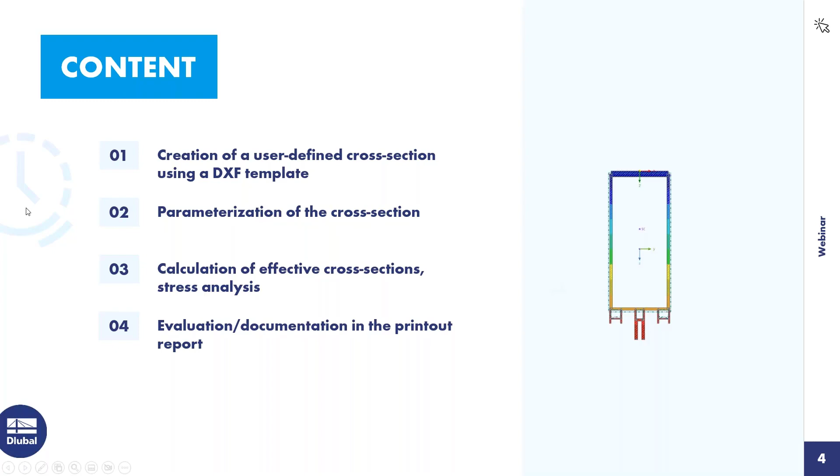The standalone program R-Section determines the section properties for any thin-walled and massive cross-sections and performs stress analysis. If you want to design special sections in RFEM or RStab that are not contained in the section library, you can create them with R-Section.

You can then import these user-defined sections into RFEM or RStab. Sections can be generated via graphical or tabular input, via importing a DXF file, or using a script. Furthermore, a parametric input is possible.

Today, I will first show how to create a cross-section by importing a DXF file, and then I will parameterize the cross-section.

I import the DXF file via Import DXF. Here I have to choose the corresponding DXF file, and then I click on Open.

In this window, I can specify the insertion point here, or I can define a rotation, or it's also possible to do a system transformation. The Z coordinate is supposed to be mirrored, so I check the corresponding checkbox.

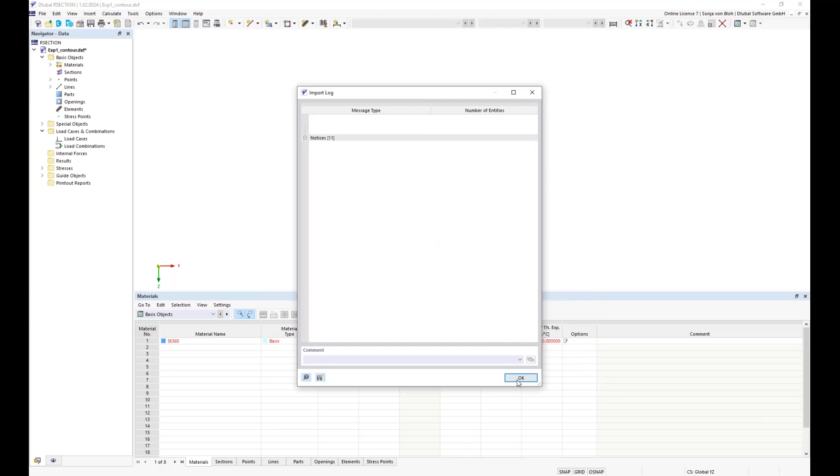And click also OK, and then all lines will be imported.

Then I set the analysis method in the base data dialog. Here I open the base data dialog and I can choose the analysis method. The following analysis methods are available.

It's a finite element analysis and the thin-walled analysis. The difference between the analysis methods finite element calculation and analysis of thin-walled structures is a calculation of the cross-section values and stresses on the gross cross-section. With the finite element calculation, the calculation is based on the FE method. When analyzing thin-walled structures, the calculation is carried out analytically.

The effective cross-section can be calculated for both analysis methods. A license for the effective cross-section extension is required for this. The green dot here in front of the extension indicates that a license is present.

After activating the extension, a standard must be selected according to whose rules the subpanels are to be generated and the effective cross-section is to be calculated. The following standards are currently available: Eurocode 3 Part 1, Eurocode 3 Part 3 for cold formed sections, and Eurocode 9 for aluminum sections. Here I choose Eurocode 9 for aluminum sections.

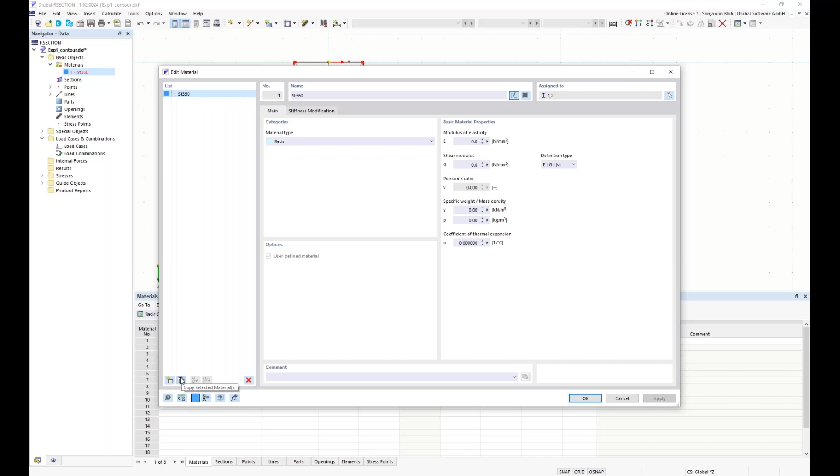I can create or copy another material on the list here on the left. These are the buttons for creation of a new material or copying the selected materials, and I can also delete the selected material. I can enter the name of the material directly here in this box. R-Section then lists all materials that match that name. If I enter the name here, you can see the corresponding materials.

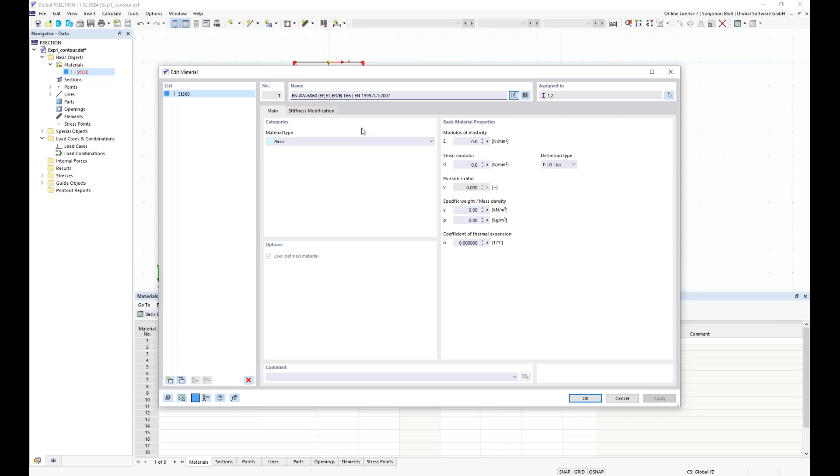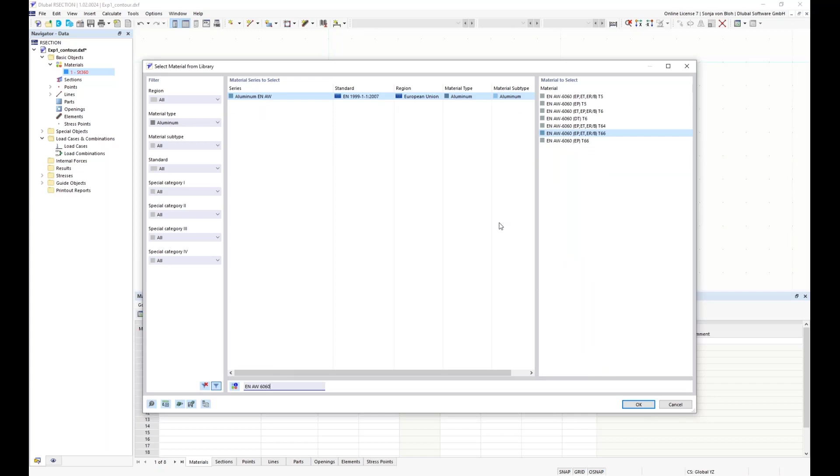I can also open the material library for a specific selection via this button. In the material library, filters are available to quickly find the material. I can choose the material type, subtype, standard, and so on. There's also a search available in this window. I can directly type in the name of the material, choose it, and click OK.

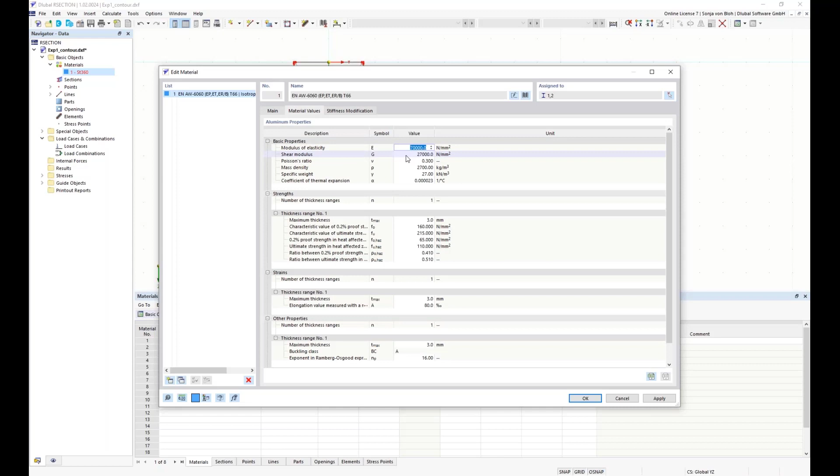If the material is not in the material library, I can create this material by activating the checkbox user-defined material. If I now go to tab material values, I can define the properties that I want. I don't want to do this, so I uncheck this checkbox and click OK.

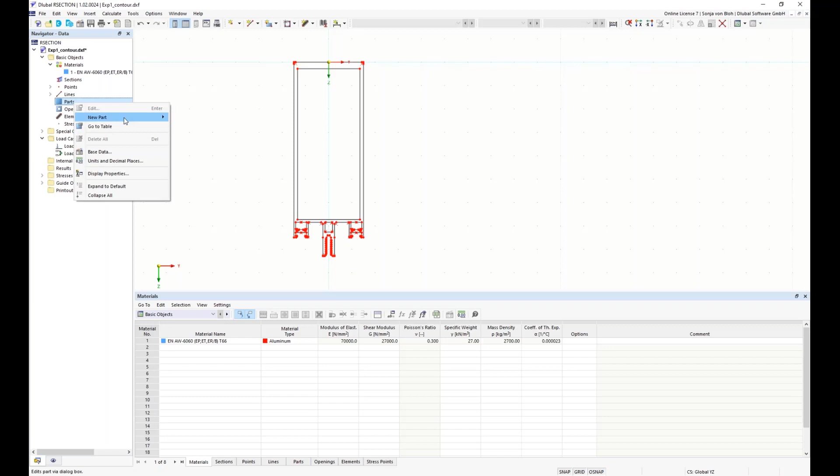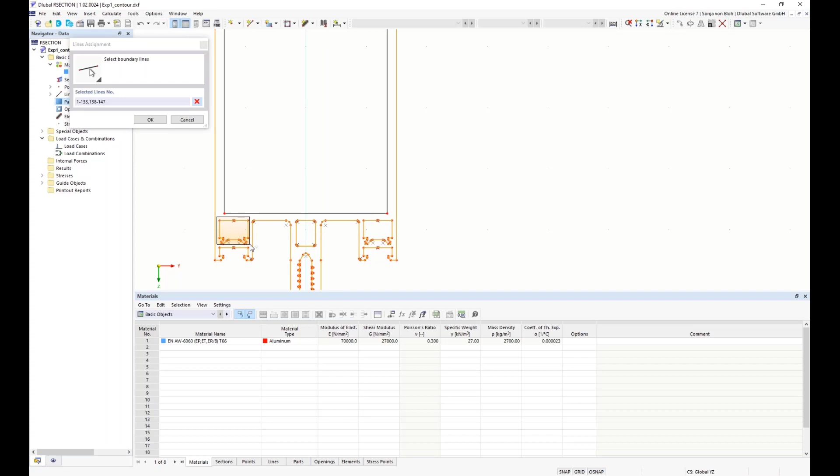After defining the material, a part must be defined for the cross-section. This part must be defined for all analysis methods. I create this part by selecting the boundary lines. For this, I go to the navigator data, then to a new part, boundary lines. Then I pick all lines, and I want to deselect the openings. I hold down the Shift key for this, and select the lines that I want to deselect. Then I click OK. The material has already been defined here. Then I click OK.

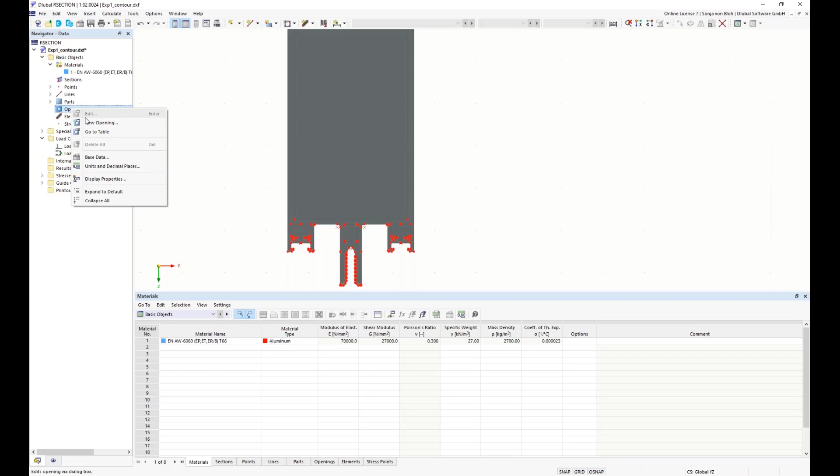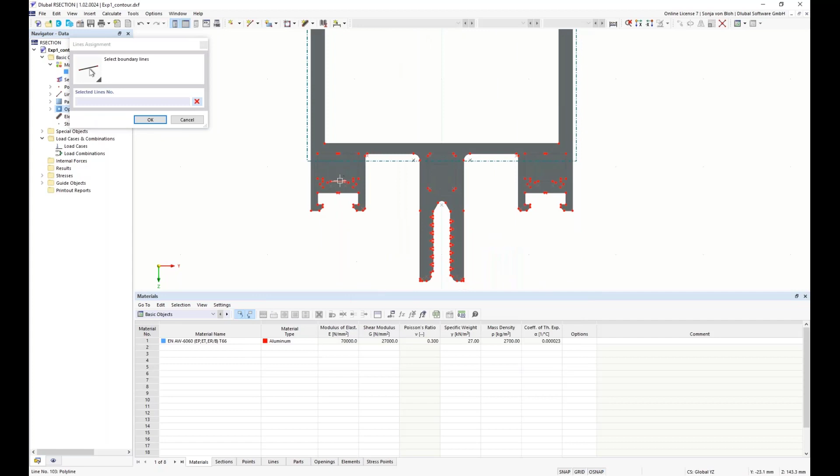After creating the part, I still need to create the openings. I will do this via the navigator data. I right-click on the openings and choose New Opening, then select the boundary lines. I click Apply and Next. Then I select the next boundary lines. Apply and Next. Next boundary lines, Apply and Next. And the last opening. Then I click OK.

For calculation of the gross cross-sectional values using the finite element method, my entries would now be complete. However, I want to make a classification and calculate the effective cross-section, so I also need to define elements. The definition of elements is necessary since the subpanels are only available here. The definition is also necessary for the calculation with the analysis method thin-walled analysis. Based on the elements, some cross-section values such as torsional moment of inertia and warping resistance are calculated if the analysis method for thin-walled structures is selected. If the finite element analysis is set, the gross cross-section values are calculated using the FE method.

The subpanels are automatically generated based on the standard selected in the base data dialog. These cannot be changed. If no elements are defined, a cross-section classification in RSECTION and the design add-ons of RFEM or RStab is not possible, and it's also not possible to calculate the effective cross-section. In the design add-ons of RFEM or RStab, this cross-section is then designed according to cross-section class 3.

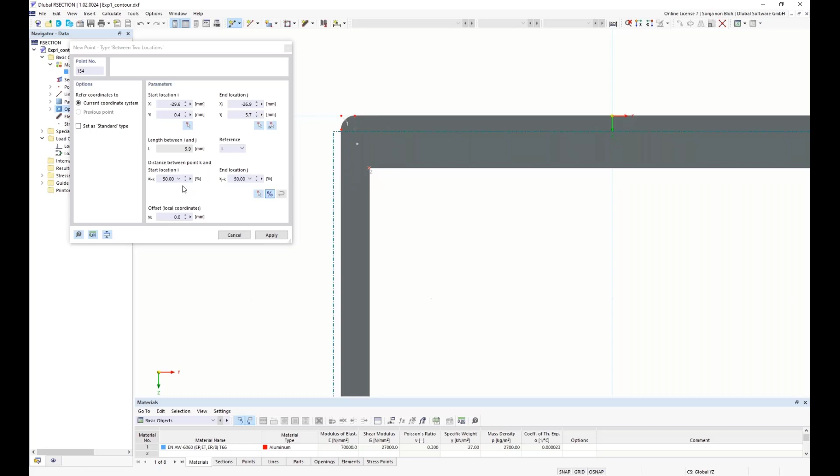I can now graphically create the start and end points of the elements, for example using the function between two locations. For this, I select the first point and then the next point, and then I can define the distance between the two points. I don't want to do this today, because it's also a good idea to create the center lines in the CAD application and import them as a background layer.

In contrast to the DXF import, in which the complete model is imported and converted into points and lines, the background layers represent a kind of layer for modeling. For this, I open in Navigator Data the background layers. Here, a background layer is already imported. I delete this because I don't need it today. Then I go here to new background layer.

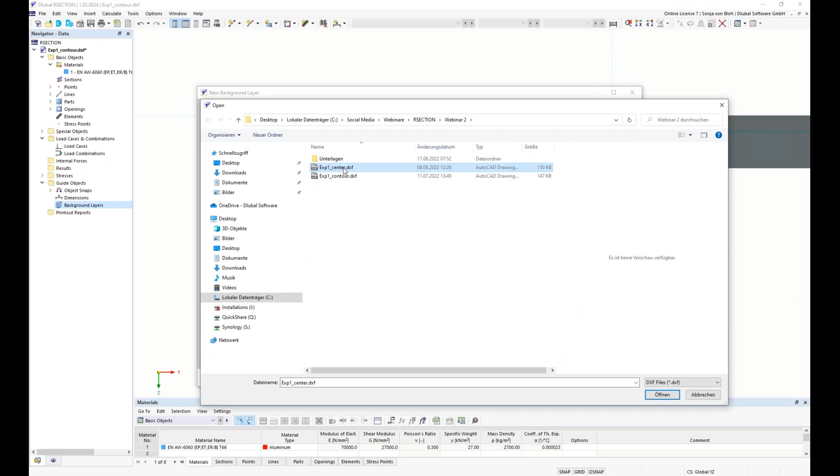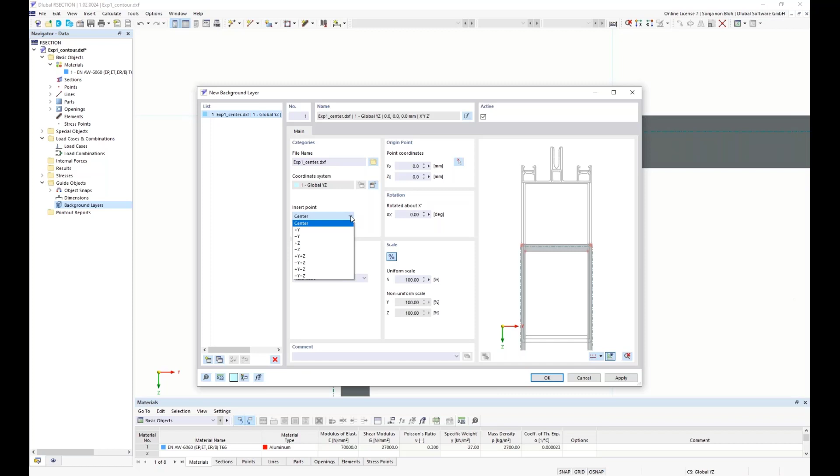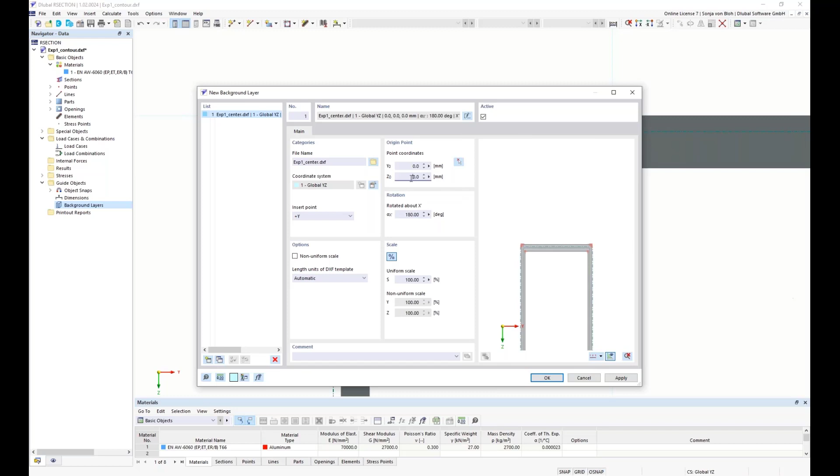Here I first select the DXF file to be imported via this button, Open File, and I choose the DXF file with the center lines. Then I click Open, and the insertion point, this point here, determines where on the envelope the background layer is placed at the origin point. I choose +Y here. I leave the origin at the 0 point, and I define a rotation of 180 degrees. I see the result in the graphic here on the right, and then I click OK.

Now the background layer is imported. Then I go to Object Snaps, and I want to control which options are activated. Here the options points, centers and focuses are activated. Points is already activated here, so that the start and end points of the center lines of the background layers are snapped. This is this checkbox.

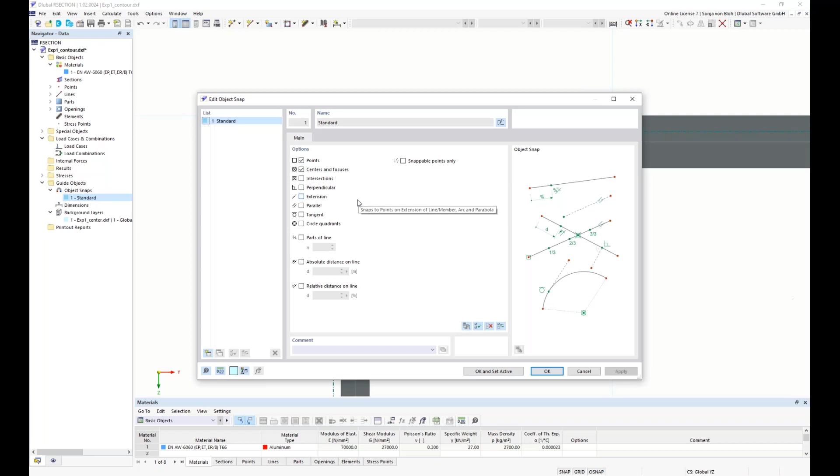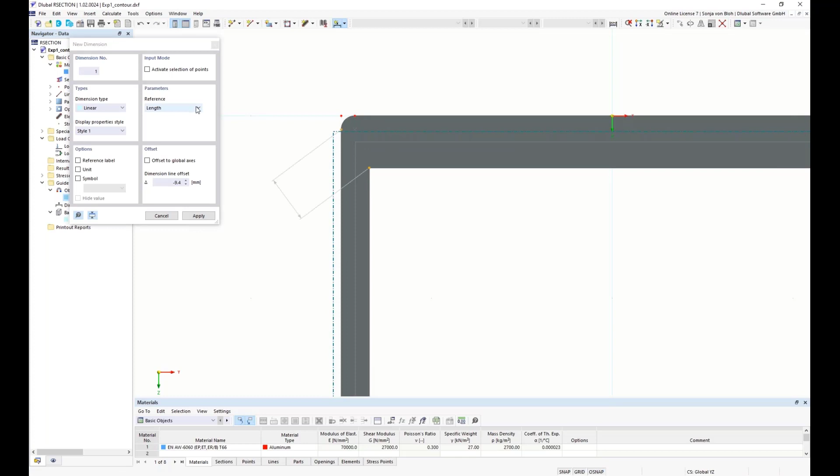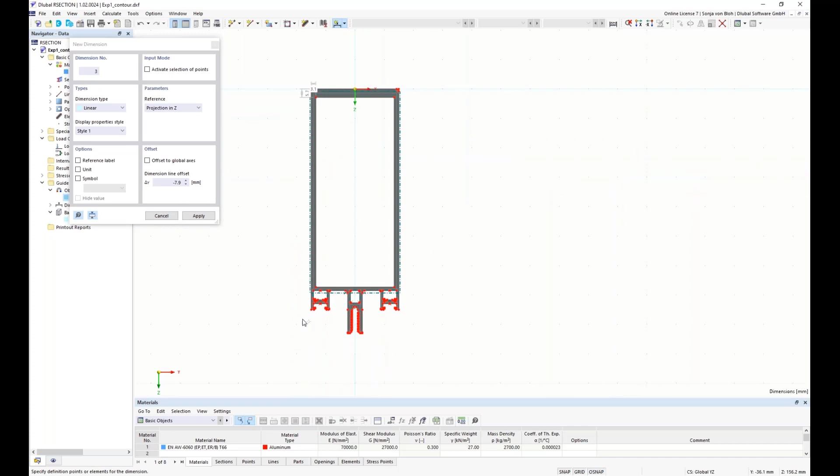Okay, I now dimension the cross-section to determine the element thicknesses. I can do this via the symbols here. We have several possibilities: I can do a linear dimension, arc length dimension, and so on. I choose the linear dimension, and then I have to click or pick the points where I want to create the dimensions. I have to change the reference to the Y direction, and I do this also for the flange projection in the Z direction. I need this also here, and the dimensions here.

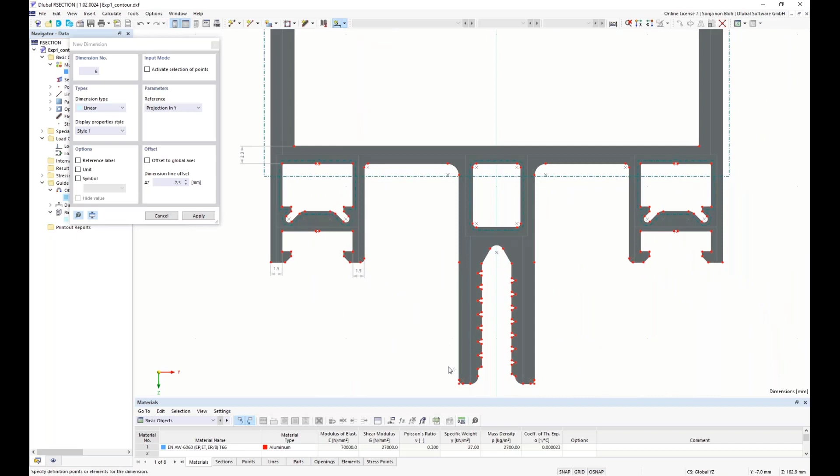And the dimensions here. I want to know which thickness is between the center point of the arc and this point here.

For this, I create a help node. And then it's possible to make a dimension here.

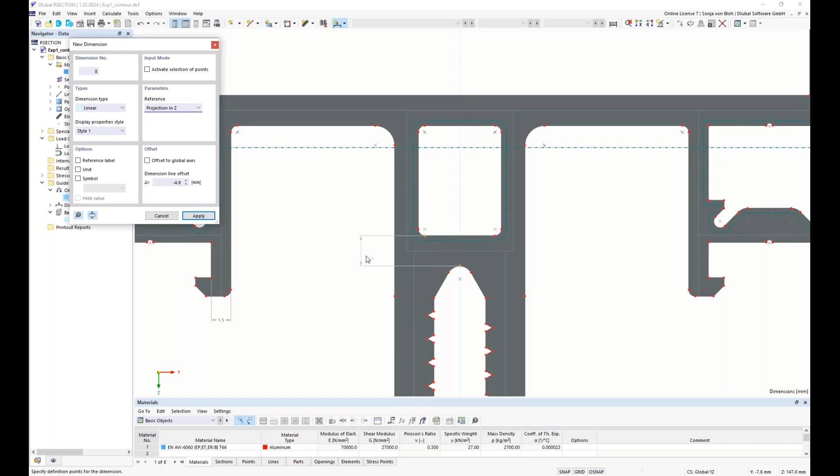I think now I have all thicknesses so that I can now create the elements. The elements can be created graphically or via a dialog. The graphical input is called up via the symbol in the toolbar here. Here I have the possibility to define a single element, arc, or circle. The input via dialog is called up via the navigator data here: new element, single line, etc.

When creating an element via the graphical input, the part is also created. If an element is created in an already existing part, this part will be extended if necessary. When creating an element via the dialog, the part and the points of the element must be created beforehand.

Elements must be connected for the calculation of the effective cross-section. The connection is to be made via the start and end points of the elements. If two elements share the same points, they are connected.

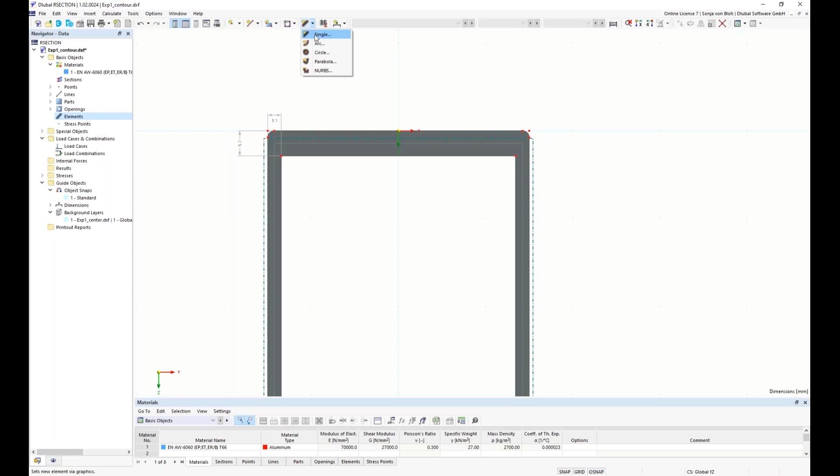I now define the elements via the graphical input, so I choose here this function, single. Then I define the thickness, 5.7 millimeters, and I pick the points on my background layer.

Then I define the elements for the web. The web has a thickness of 3.1 millimeter. Same on the other side.

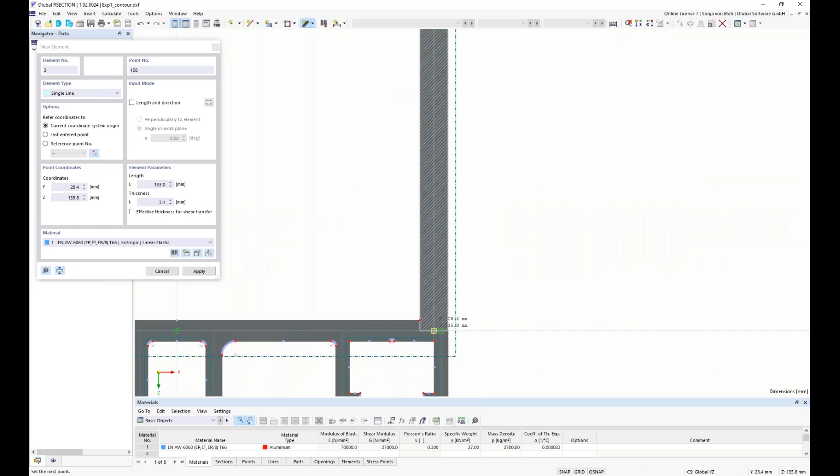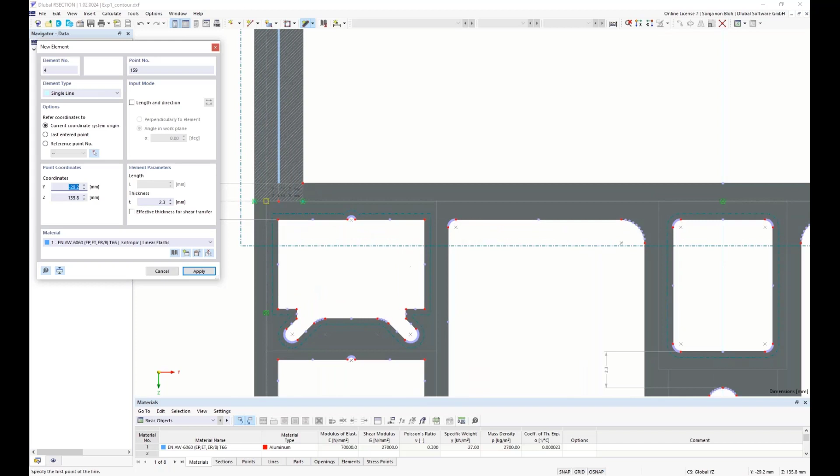Then I define the elements here on the flange. They have a thickness of 2.3 millimeters. I pick the corresponding points.

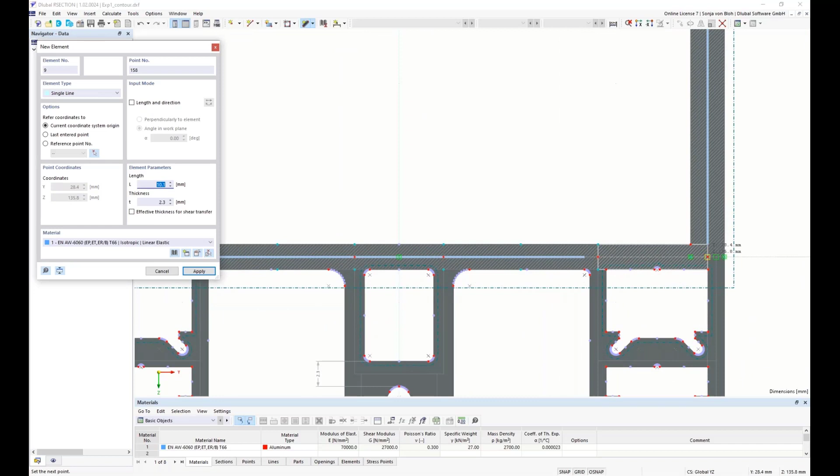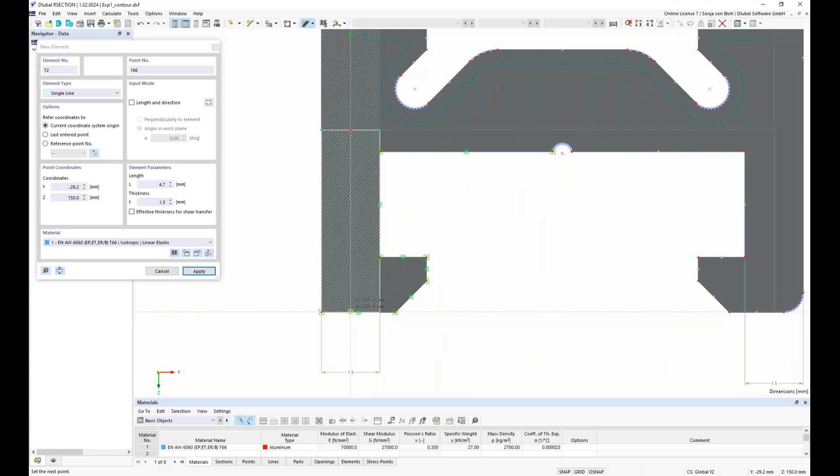Then I have to create the elements here. They have a thickness of 1.5 millimeter. Same on the right side of the cross section.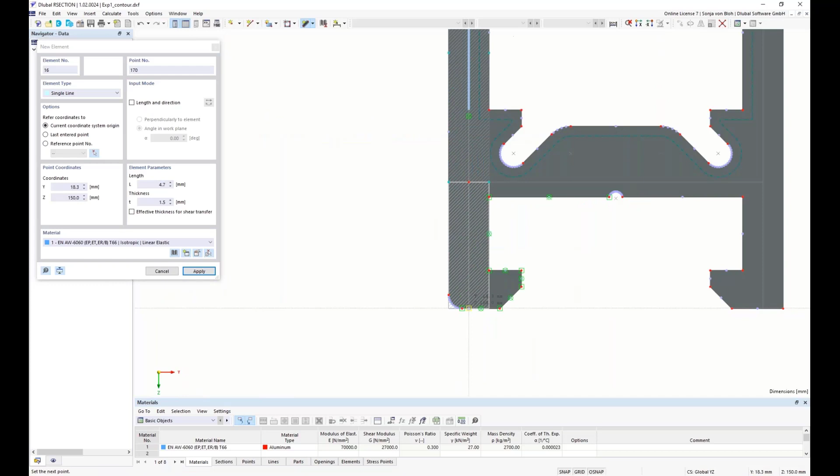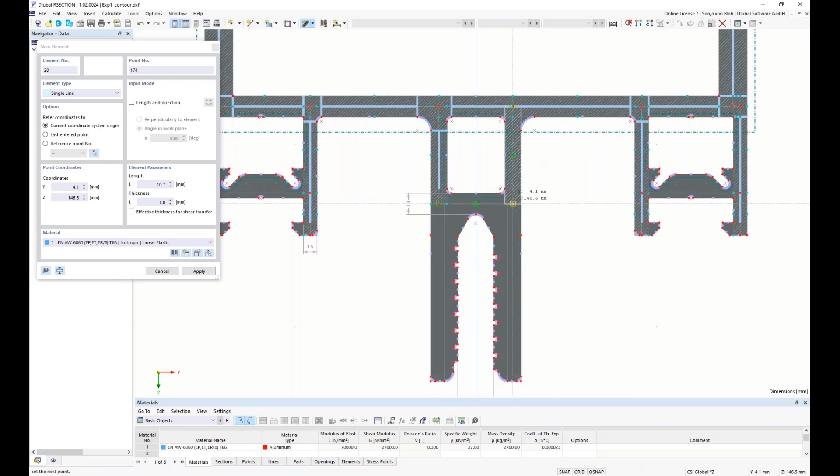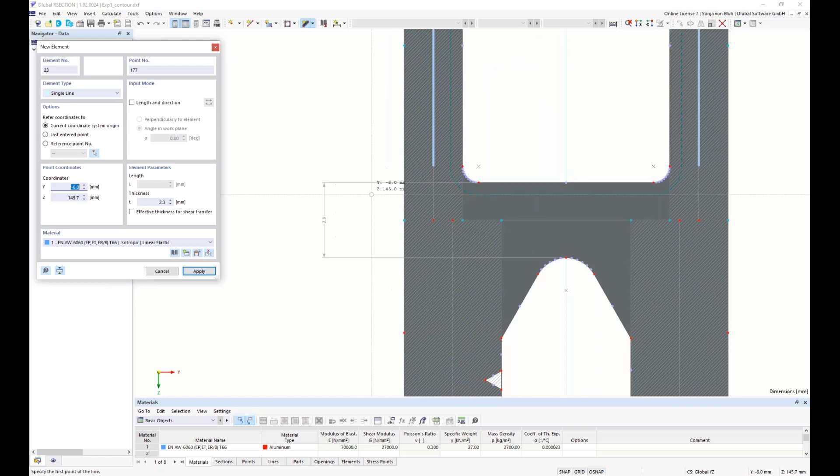Then I create the elements here in the middle. Then the connecting element here. And then the elements here.

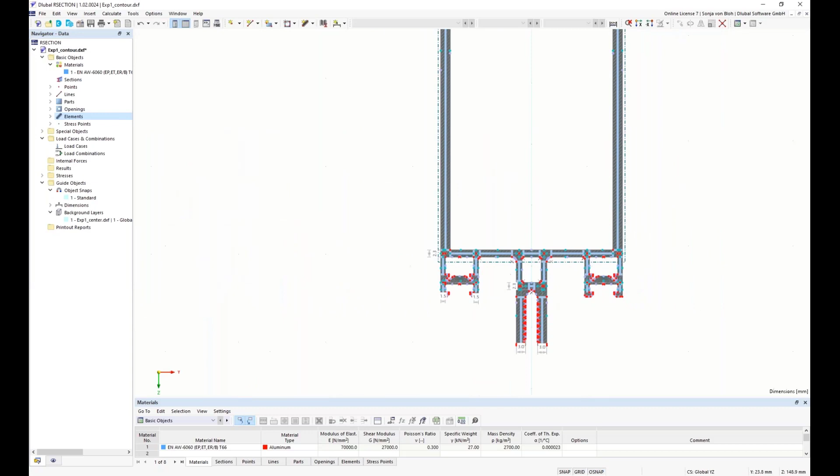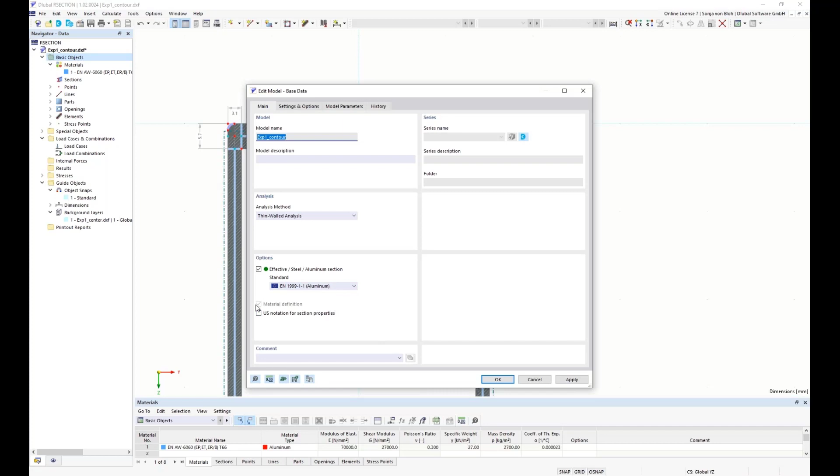The cross section is now complete. You can see the subpanels here that were automatically generated according to the rules of the standard that I have chosen in the base data dialog. Here it's a standard Eurocode 9.

If this cross-section is available in different dimensions, a parametric input is recommended. The parameterized input makes it possible to enter model data and internal forces in such a way that they depend on certain variables. These variables, such as length, width, or thickness, are called parameters.

The cross-section is in different heights, so I wanted to parameterize the height. The parameters can be defined in the global parameters, and I can open the dialog via the table, and here, clicking on the symbol, edit global parameters.

First, I have to specify the name of the parameter in this cell. The name of a parameter must consist of ASCII characters and no spaces. The parameter is addressed in the formulas via the name, and each name may only be assigned once.

I create a parameter called h1. This is for the height of the cross section.

Then I have to define the unit group, and the unit group of the parameter determines whether the parameter represents a length, thickness, angle, etc. I can choose this in the drop-down. Here I define the unit group length.

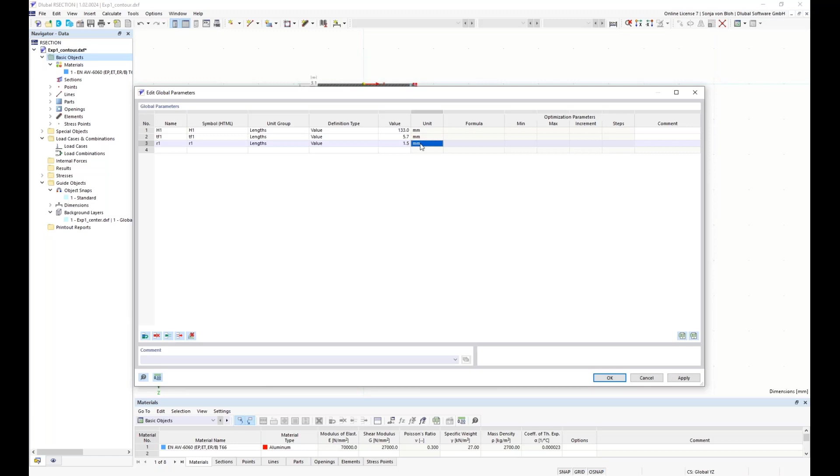I call it R1. This is for the radius, and I define the value 1.5 millimeter. Okay. Then I click on OK.

I then define the coordinates of the top area using my parameters. The top area is this here. And for this, I go to the table points.

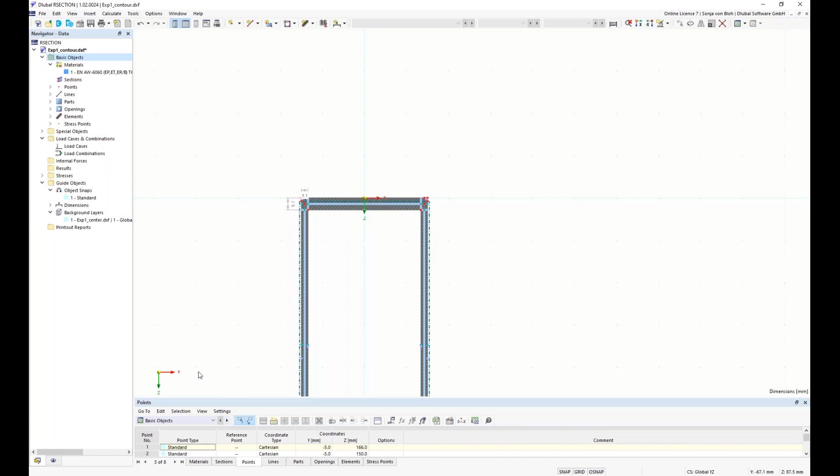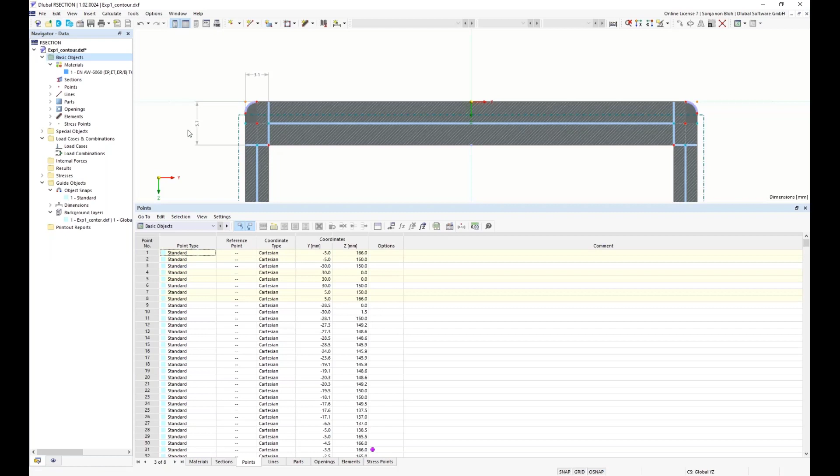I see here I don't need this point. This point is not needed, so I can delete it. I go to Edit, select the points, and then I click on Delete.

And now I want to parameterize all these points, so I select them, and then I go to this table function, selected objects only, so that only my selected objects will be displayed.

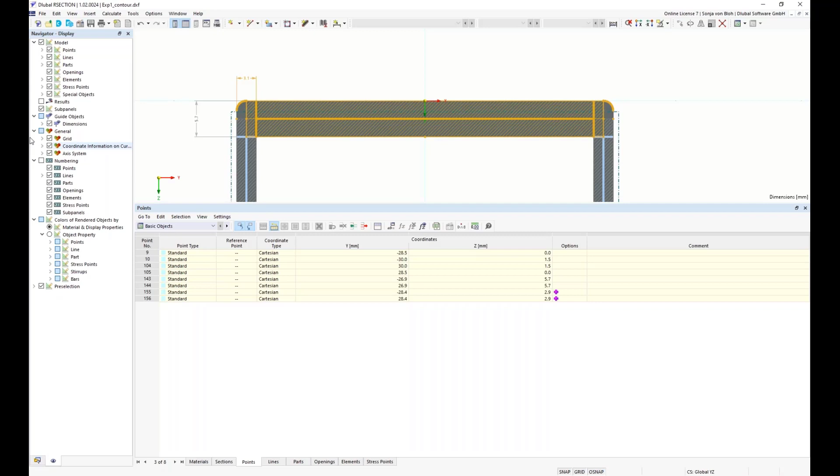I turn on also the numeration, or the numbering, of the points.

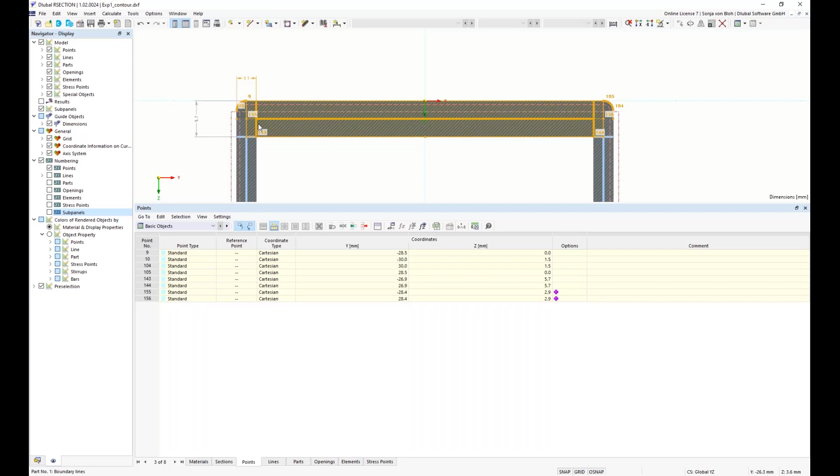And you have the option of addressing objects and their properties directly. For example, I can access the coordinates of points. If I want to access the coordinate of the point here, point 157, then I have to define this via the properties.

A list of the properties can be opened via the menu View and then Console. And then here, if I click on the info button, then I see all object properties. Here I have the object property points, and the property coordinate 1 is for the y coordinate of the point, and the point I have to specify in these brackets. The coordinate 2 is for the z coordinate of the points that I have to specify in these brackets.

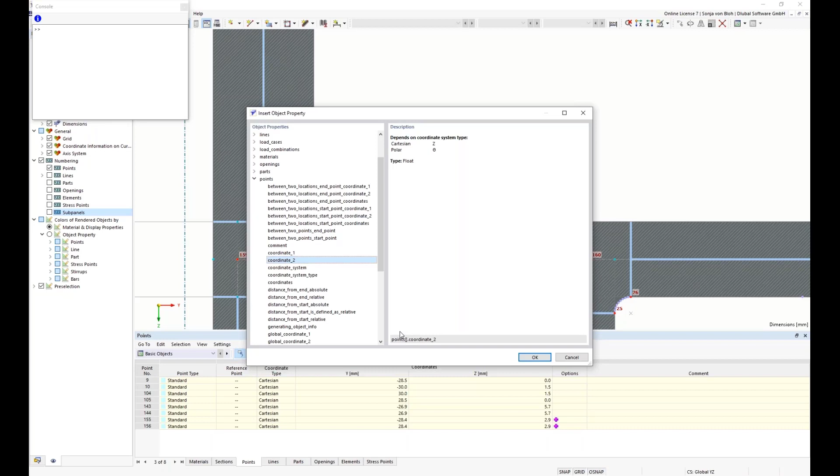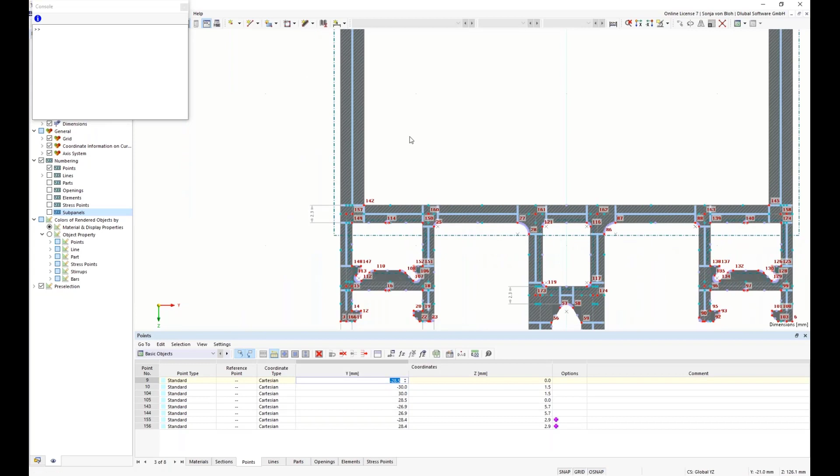I now define the coordinates depending on my parameters. I can do this directly in the table. I want to define the y-coordinate of my point number 9. To do this, I type in equal points 10, coordinate 1, so it's the y-coordinate of my point number 10, plus my global parameter R1 for the radius.

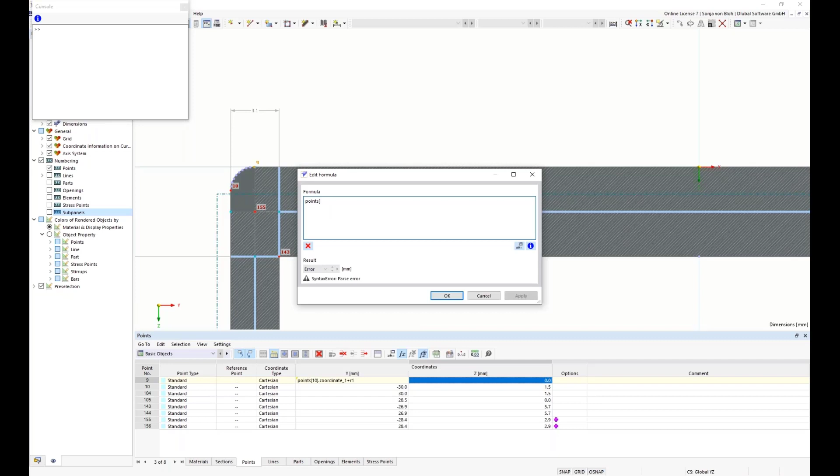I can show the formulas via this button, and it's also possible to define the parameters or formulas in an additional window, the Edit Formula window. Here I define the z-coordinate of my point number 9. This is the z-coordinate of point 157: points 157, coordinate 2. For the z-coordinate, minus h1 minus tf1 divided by 2. Here I see the result.

Then I click OK. It's also possible to copy the formula. So I open the dialog again, and then I copy this formula because I need it for the definition of my point number 10. For this, I open the Edit Formula window again. Then I paste this formula, and it's the same, but additionally plus R1.

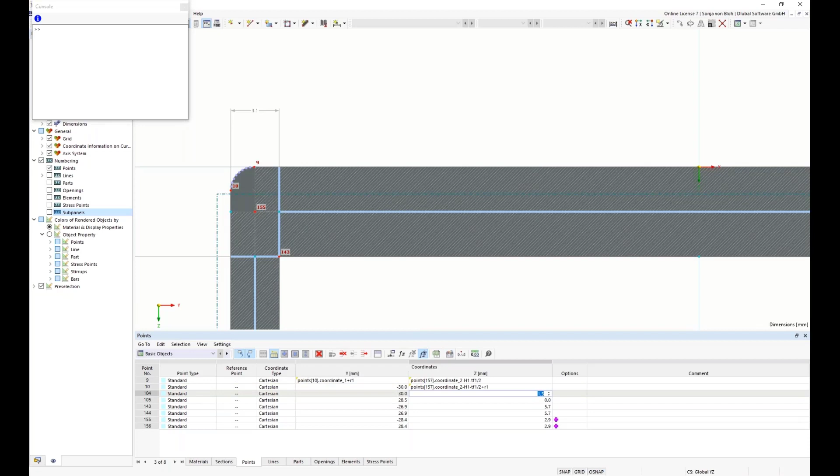Then I define the z-coordinate of my point number 104. For this, I open the Edit Formula window again, and this is also plus R1.

I do the same for point number 105. This is the y-coordinate from my point 104, minus R1. And this is points 157, the z-coordinate minus h1 minus tf1 divided by 2.

Same here, but here it's plus tf1 divided by 2. Same here, this is only minus h1. And the same here.

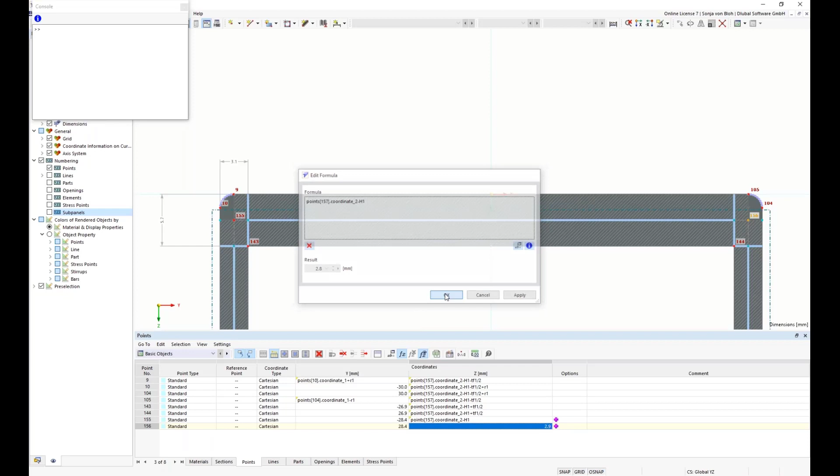Now I have to parametrically define the control points of my arcs, the ones on the left and on the right. For this, I open the Edit Arc dialog via double-clicking on the arc, and then I can define the control point. For this, I open the Edit Formula window of the y-coordinate of my control point. Here it's points 9, coordinate 1, minus R1 divided by square root of 2.

I copy this formula, click OK. Then I have to define the Z coordinate. For this, I open the Edit Formula dialog again. This is the Z coordinate of point 10, so I have to change it here: Z coordinate minus R1 divided by square root of 2.

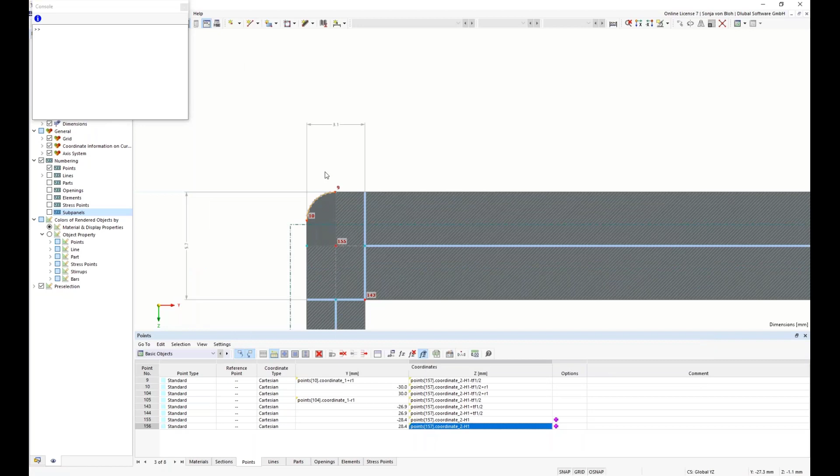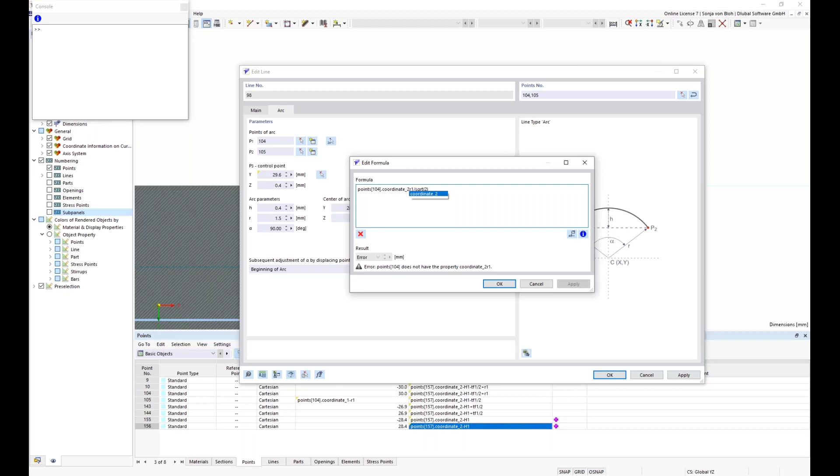I have to do the same for the arc on the right side. So I double click on this line, open the Edit Formula dialog, and paste the formula. It's the y-coordinate of point number 105 plus R1 divided by square root of 2. And this is the Z coordinate of point 104 minus R1. Then I click OK.

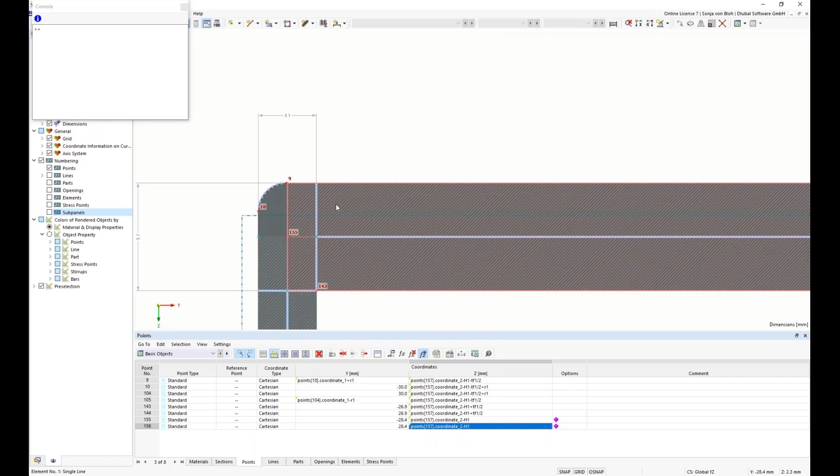The thickness of the element must also be defined with a parameter. So I open the Edit Element dialog, and here I define the parameter for the thickness. For this, I open the Edit Formula window again and define here TF1.

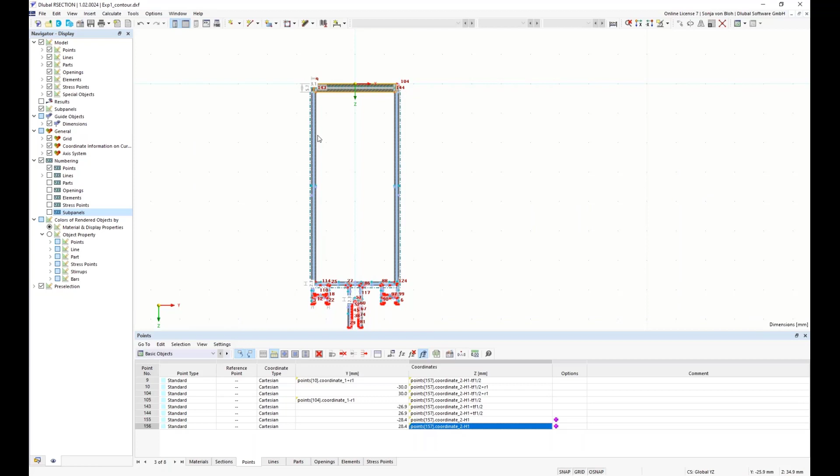Now I've defined all parameters, and for control purposes, I measure the height. For this, I create a linear dimension between the points 155 and 157.

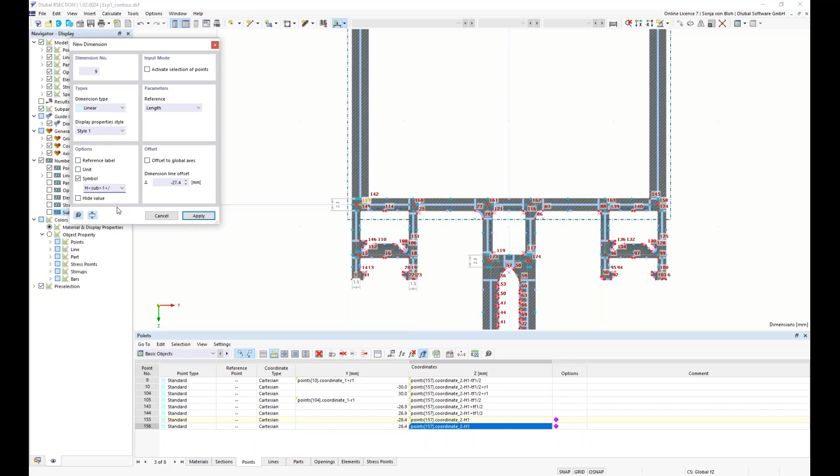You can also add a dimension symbol if you activate the symbol checkbox, and you can also use HTML commands and special characters called entities. A subscript is achieved with a sub tag. So if I want to define H and then 1 as subscript, it's sub, 1, and then the end tag.

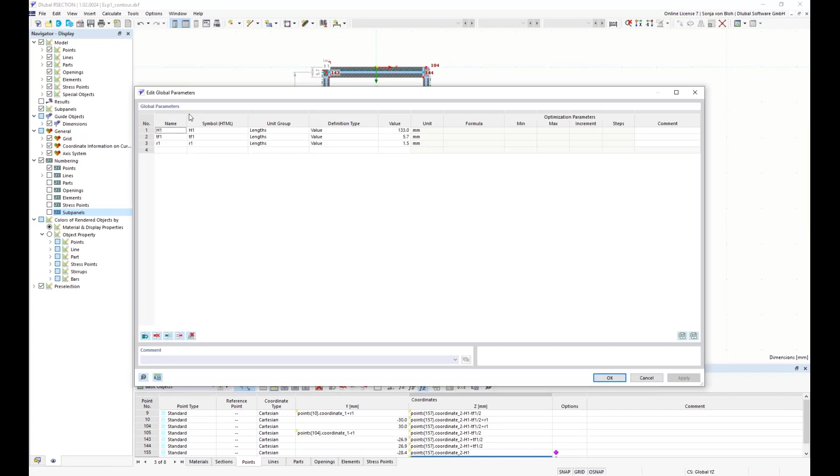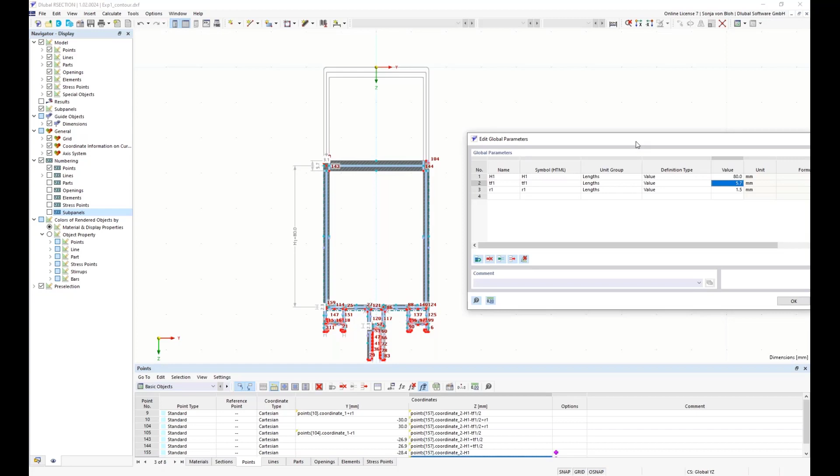Then I will show you the parameterization. For this, I change my parameters. Maybe here I change the height H1 to 80 millimeters, and if I click on apply, you can see the result. I change it back to 133 millimeters and click OK.

I would also like to use this example to show you how to calculate stresses on the effective cross-section. In order to calculate stresses on the effective cross-section, a load case must be created first. A load combination can also be created.

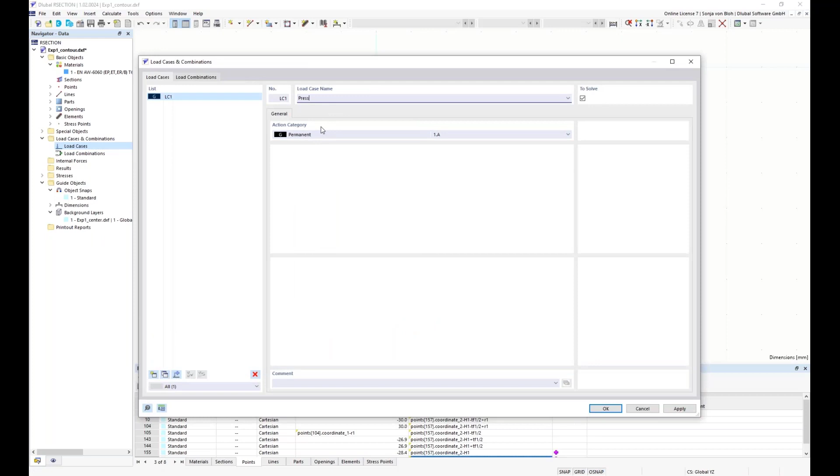I create a load case via the navigator data. For this, I right-click on the load case and choose new load case. I define the name pressure, and then I click on OK.

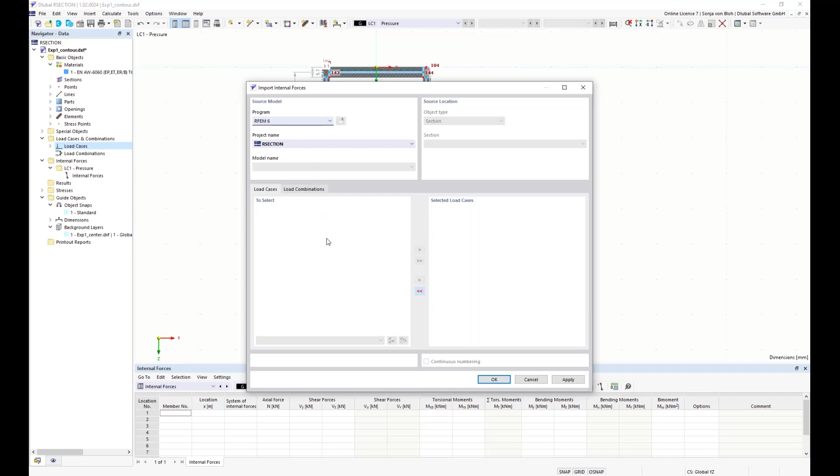Then I have to define internal forces. I can do this via the navigator data, or via the table. If I choose internal forces here, it's possible to define them manually. It's also possible to import the internal forces from RFEM or RStab via this button. Only import from RStab 9 or RFEM 6 is possible, and the file must be saved with results for this. A load combination is supported as a load case, but I don't want to import internal forces today.

I want to define them manually in the table. For this, I have to enter the member number and the location, and then I define an axial force, pressure, minus 2 kilonewton.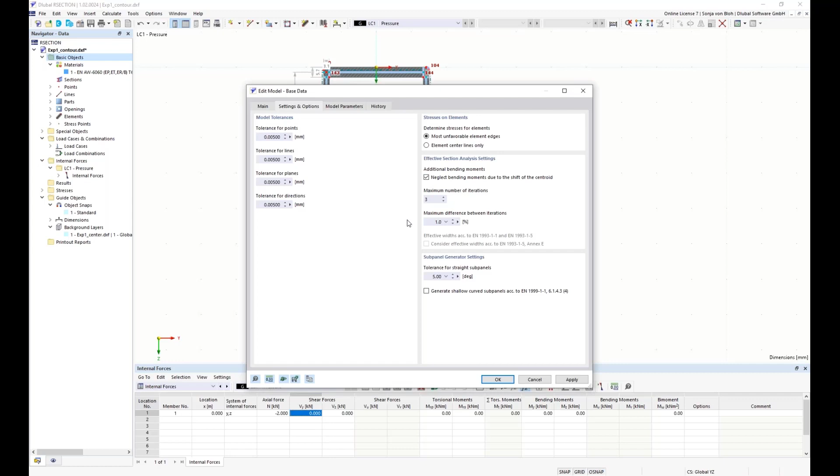In the base data, I can make detailed settings. So I open the base data dialog again, and then go to the tab settings and options. Here I can define if the stresses for elements should be determined at the most unfavorable element edges or on element center lines only. It's also possible that an additional acting bending moment, which results from the shift of the centroid of the effective cross-section relative to the centroid of the cross-section, should be neglected. So I activate this checkbox, and then I click on OK.

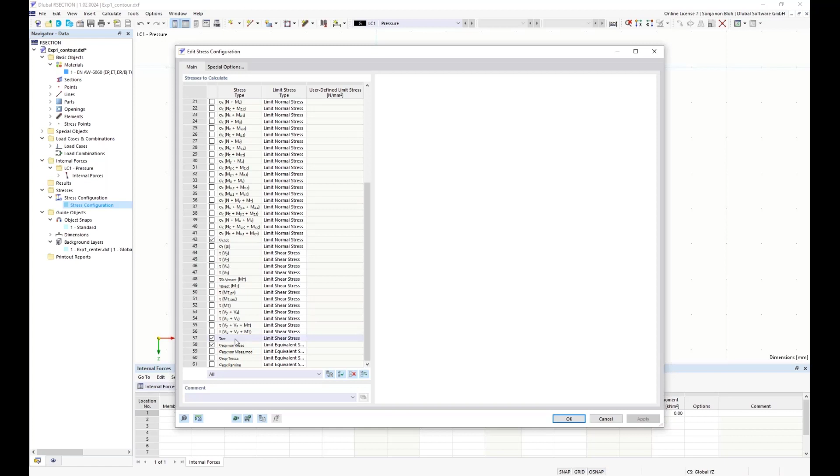Which stresses are to be calculated and output in tabular and graphical form can be set in the data navigator. Here under stresses, stress configuration, I open the corresponding window, and here you can activate or deactivate the stresses that should be calculated. Here the stresses sigma x total and tau total are activated. This is okay, and then click on OK. And then I'll start the calculation now. So I go to calculate, calculate all.

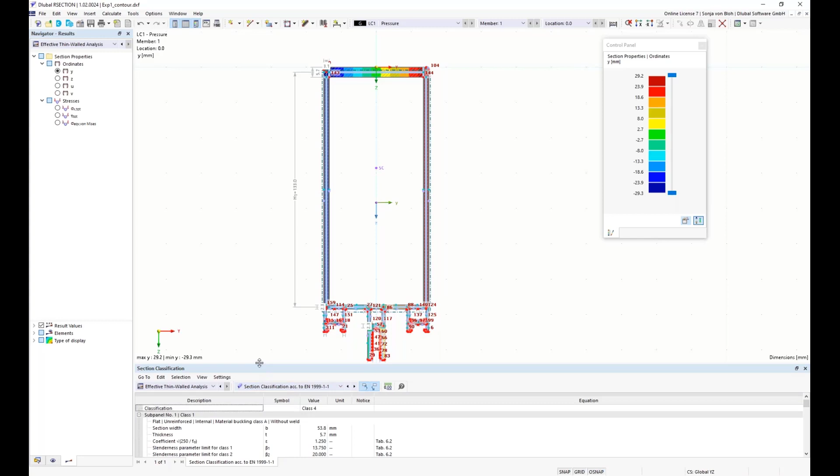And in the table, you have the results for the gross cross-section. This is here the thin-walled analysis. This is the sectional area for the gross cross-section, and you can switch here to the effective thin-walled analysis. Then the sectional area of the effective cross-section will be displayed. This is less than the gross cross-section, so I assume this cross-section has class 4, and you can see this also in additional tables. Here you can choose the section classification, and I can see, okay, this is class 4, and the subpanel number 2 is class 4. This is also selected here in the graphic, and I can switch also the graphical results to a thin-walled analysis. This is for the gross cross section here, sigma x total, and I can see here also the effective cross section, and I can see, okay, the web is here reduced.

If I want to know the reduction, then I can go to the corresponding table. Here, reduced thicknesses. I click on the corresponding subpanel, and I see the effective thickness is here 2.4 millimeters.

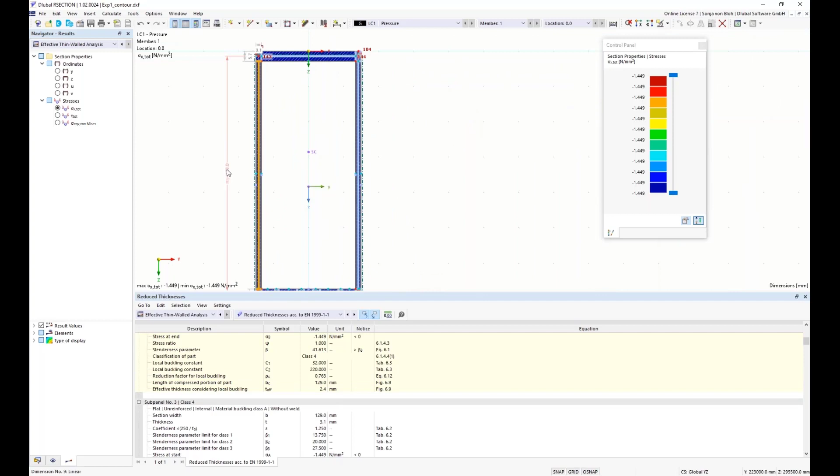I can also set the display type in the navigator results. Here I can choose between isobands or isolines, and here I can choose the option off.

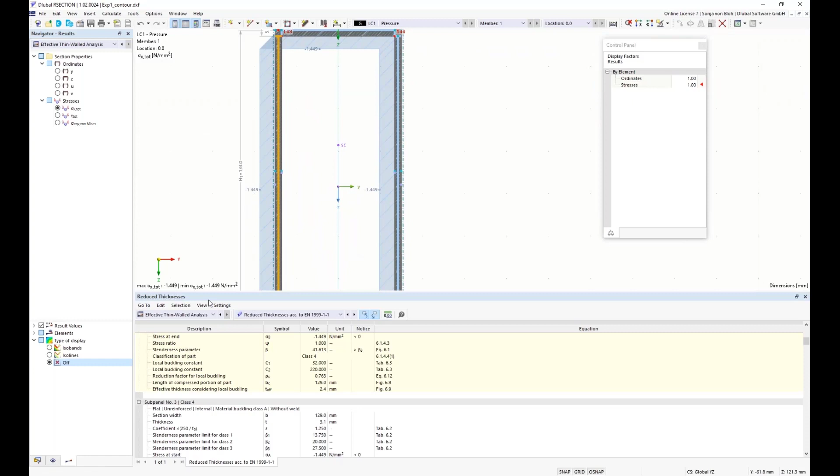And finally, I would like to show you the documentation. The printout report is structured in the same way as in RFEM 6 or RStab 9. You can create a new printout report using the data navigator. So I switch to the navigator data, and then I right-click on the printout report and choose here the option New Printout Report. Then the Printout Report Manager opens, and here I can activate the report items that I want to print in the printout report.

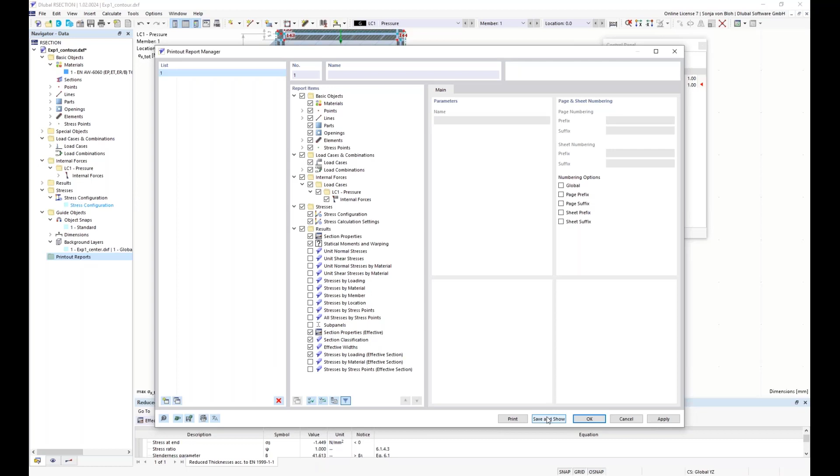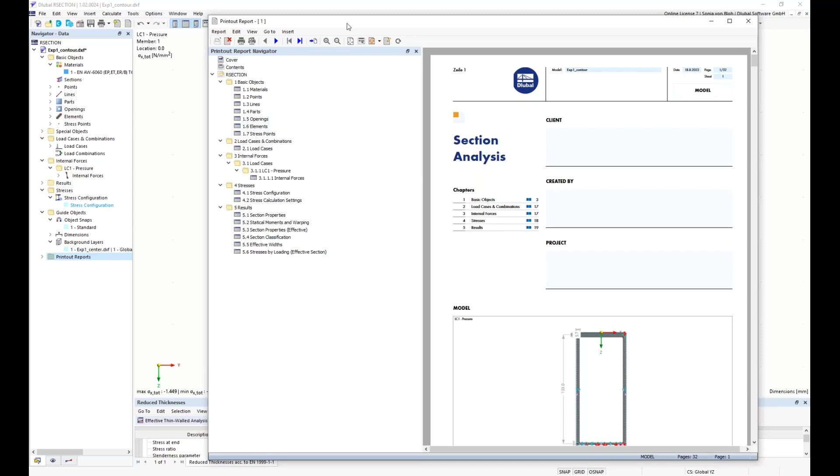Here I deactivate the unit stresses of the gross cross section. And if I click on Save and Show, then this opens the printout report. Here I have all tables that I have selected before.

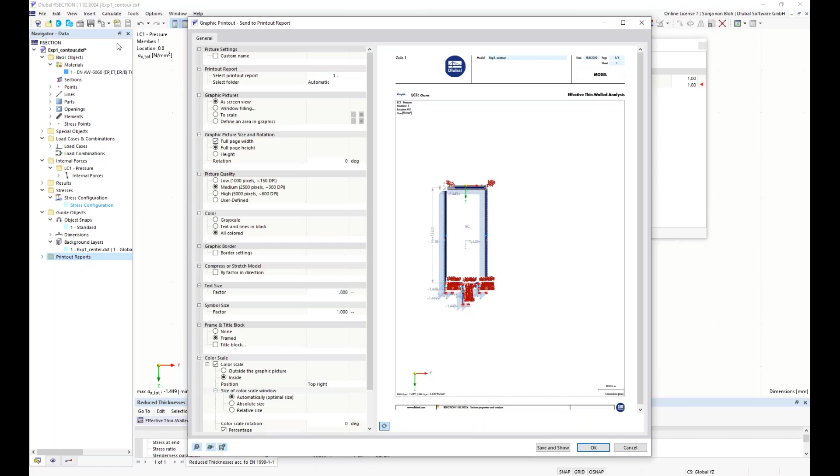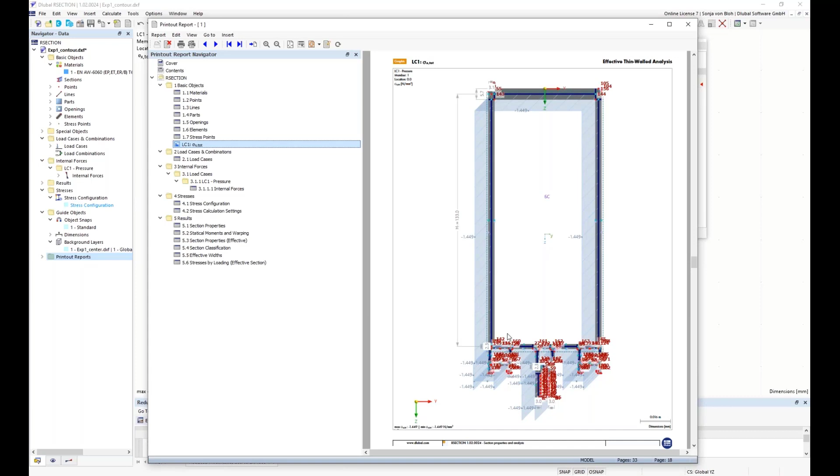It's also possible to print a graphic to the printout report. For this, I go back to our section, and then I choose print graphics to printout report. And here I can define the graphic pictures. This should be window filling. Then I go to Save and Show, and then this graphic will be printed to the printout report. If I don't want to have the numbering, I can go to Edit, and then I can deactivate the numbering, go back to OK, and the graphic will be changed.

With the presentation of the documentation, I've now come to the end of my presentation. I will now give the floor back to Andreas. Okay, thank you for your presentation.